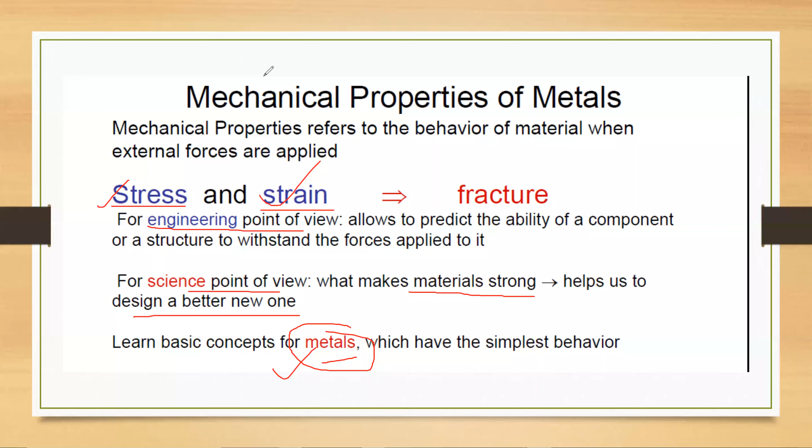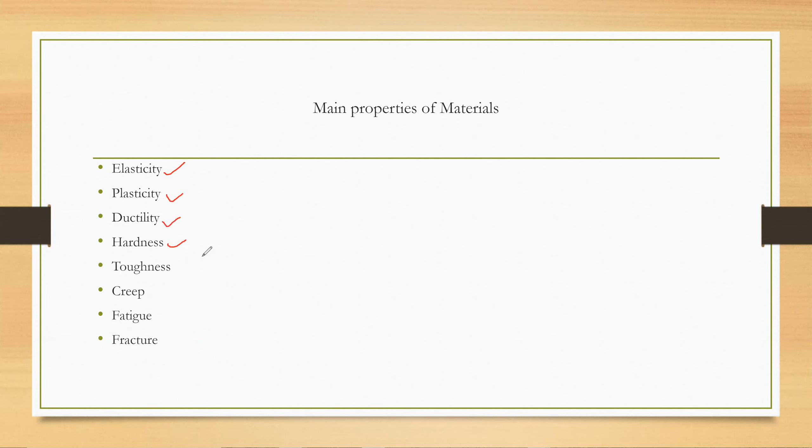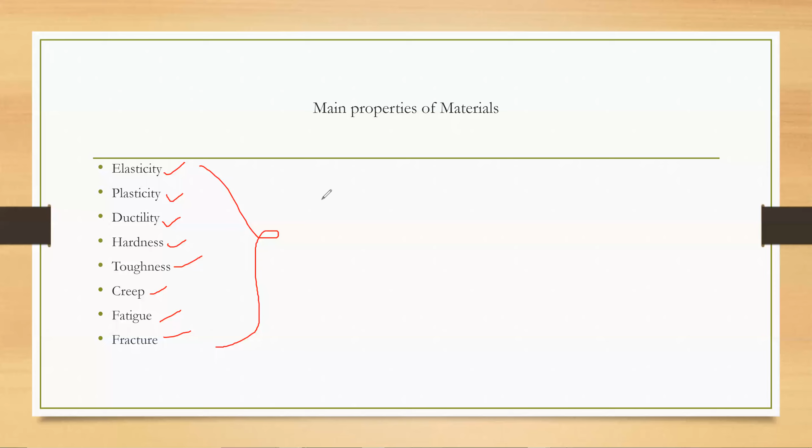So what are the properties of materials that we are most interested in in strength of materials? These are elasticity, plasticity, ductility, hardness, toughness, creep, fatigue, and fracture. We have to know all the definitions for these material properties from an exam point of view because they ask these questions. So we have to know one-line definitions for all these material properties. Going to the next slide.

For example, we have a material here, and when it is subjected to external forces F, we have atoms in between the material. Whenever it is subject to a force, these atoms will try to pull this material inside. These are a kind of restoring force for this material. When we remove the forces, the material will come back to its original position from the deflected position. This is called elastic deformation. And after we remove the forces, if the material doesn't come back to its original position, then we call it a plastic deformation, because the atoms are permanently displaced in case of plastic deformation.

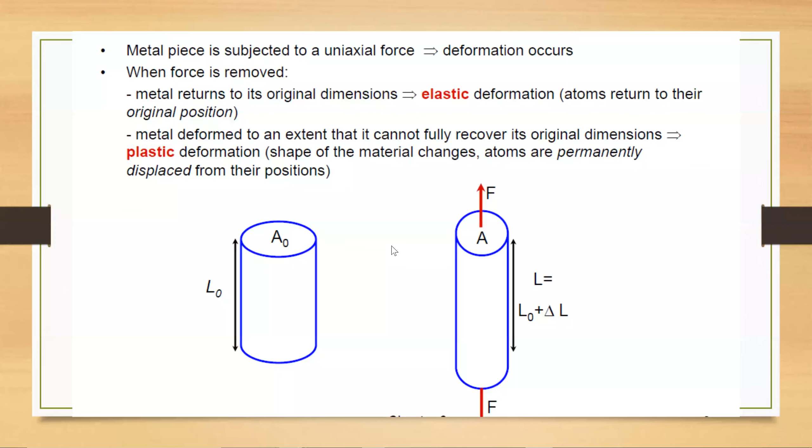From a design point of view, we don't want plastic deformation. We want elastic deformation, because if plastic deformation is happening in a material, then we can say the material is yielding and it is not meeting our design requirements. We can apply various types of loads on a structural component, like tension and compression. Tension will be the outward force, and compression is inward. Other kinds of loads such as shear force, torsion, and bending can also be applied. These loads we will see in the subsequent slides one by one. Going to the next slide.

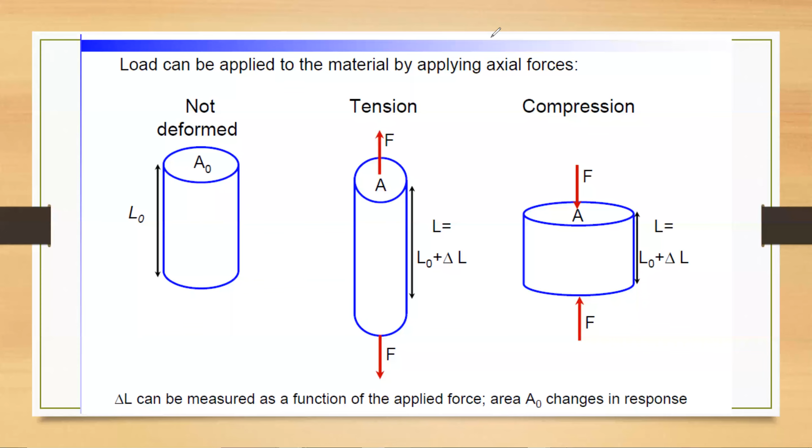Now we will discuss two very important parameters, stress and strain. So what is stress? We have a component here and we are applying a tensile force, and because of that the material will be deformed. We can define stress as the restoring force exerted per unit area. The restoring force is the interatomic forces here, which will try to pull the material inward. This is the external force F, and this is the restoring force, which is pulling the material inward due to the interatomic forces within the material.

So this is the restoring force, divided by the area where the force is applied. This will be the cross-sectional area in this case, through which the external force is applied. So stress is the restoring force divided by the cross-sectional area.

And what is strain? Strain is the change in length to the original length. Whenever we are pulling the material, we will get a change in length. And this is the original length L. So the ratio of the change in length to the original length is strain.

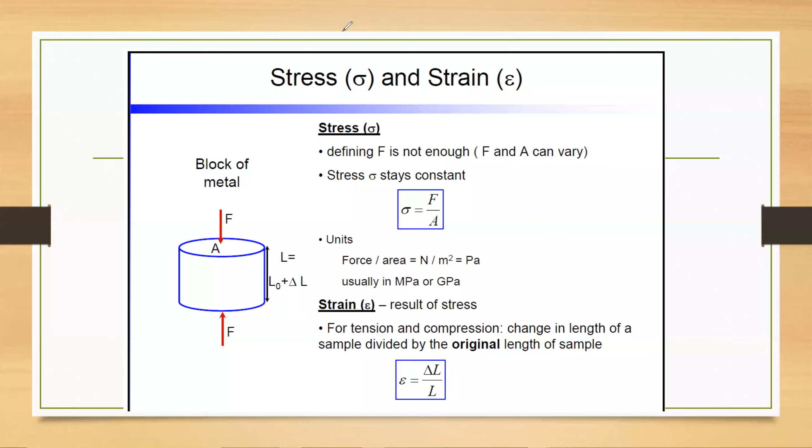So the unit of stress is Newton per meter square, Pascal or megapascal. And strain is dimensionless because we are dividing one length value by another, so we don't have any units for strain. Let's go to the next slide.

One more thing about the universal testing machine is that we have a computer attached to it, and during the runtime we will get the plot for the stress and strain as we do the experiment. These are basically servo-hydraulic UTM machines, and now they're featured with computers from where you can get the stress strain curves. So let's go to the next slide.

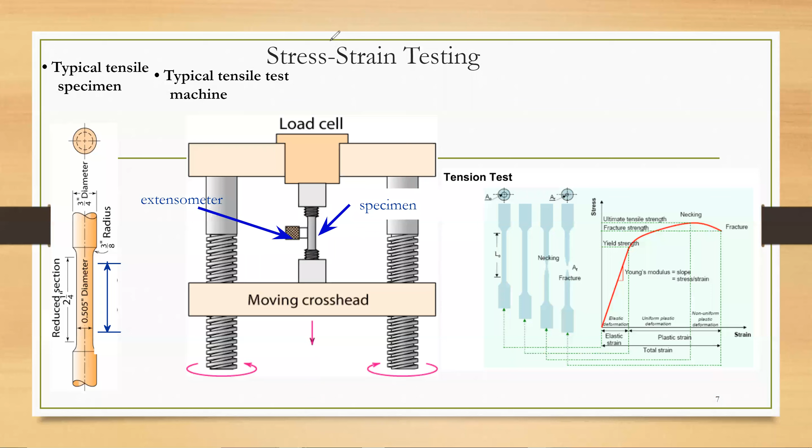If we don't have the value of E, we can get it from this curve by finding the slope with respect to the x-axis. Just test a tensile specimen, get the curve and the slope, and we get the Young's modulus. These are the important points I wanted to discuss regarding the stress strain curve from the UTM. So let's move to the next slide.

We have seen the force versus deflection curve from our tensile testing machine. This curve can be linear, where force is directly proportional to deflection, or it can be non-linear of this form. Rubber exhibits non-linear properties, where force is not directly proportional to strain. For metals, we have a linear property up to the elastic limit. Let's move on to the next slide.

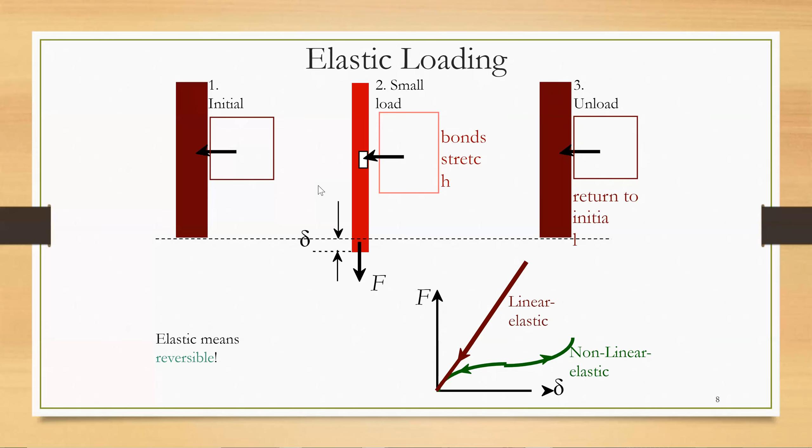Here we're going to discuss two important concepts: true stress and strain, and engineering stress and strain. What are the basic differences between them? Whenever we pull a material with a force F, first we get some necking in the material like this. Then after some time we have a failure. If the material is ductile, we have a cup and cone failure, a complete collapse in the necking region.

So we can see at different instances we have a reduction in area. Here we have area A, here we have a lesser area in the necking portion, and here we have an even lesser area. So stress is equal to force exerted per area. This is our normal definition. So from here we can see what is the difference between true stress strain and engineering stress strain.

So in true stress strain, we are getting the instantaneous area. What do you mean by instantaneous? That is at any instant of time. For this scenario, we will take the area in this instant. For this scenario, we'll take the area here. And for this, we'll take the area here. So for all the three cases, our area is changing in this part. So we can say that the area is decreasing.

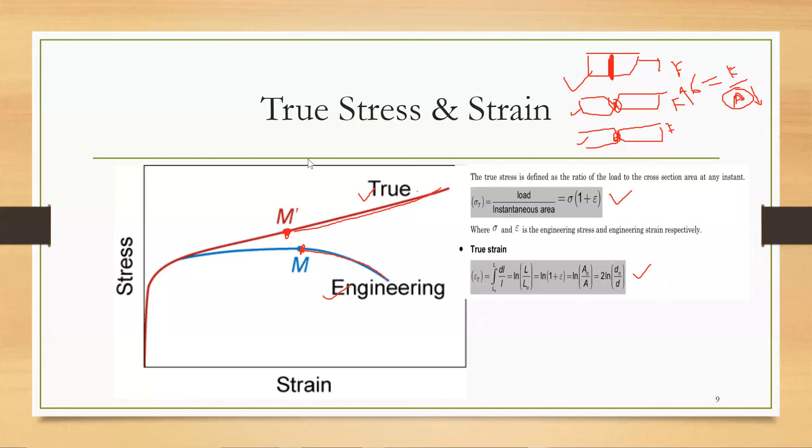And these are basically empirical relations that we have to remember in order to convert the engineering stress strain curve to true stress strain. Normally, when you do design problems, we get engineering stress strain from the supplier, and we have to use these empirical relations to convert it to a true stress strain curve. If we do CAE simulations, for example, in product design, we have to convert it to true stress strain because the solver supports true stress strain. And true stress strain will give you accurate results because it is using the instantaneous area of cross section. So basically, this is what I wanted to discuss here. So let's go to the next slide.

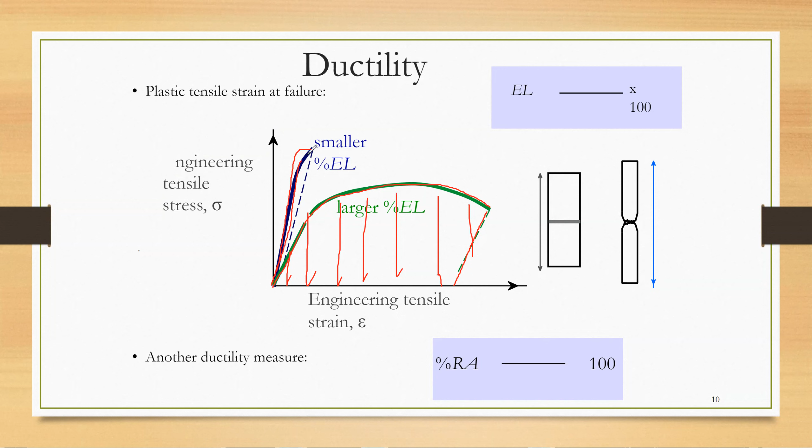So here we'll discuss a property called ductility. So what is ductility? Ductility is a property of material with which we can draw it into thin wires. We desire ductility, because if we have ductility, then the material will not fail easily, and we will have a kind of warning that the material is failing. So ductility is good. And basically, when you have a ductile material, the area under the stress strain curve is more. That's why a ductile material will have more toughness compared to a material having less ductility. Let's move on to the next slide.

So another important property of a material is toughness. Toughness is the energy required to break a unit volume of material. Or we can say that toughness is the area under the stress strain curve up to fracture. So if we find the area under the stress strain curve up to the fracture point, then we will find toughness. More the area under the stress strain curve, more is the toughness. Lesser the area, lesser the toughness. So metals are ductile and they will have more toughness. Ceramics and brittle materials will have less toughness. They will break very early, and that's why the area under the stress strain curve is less. That is why they are less tough. So this is another important property.